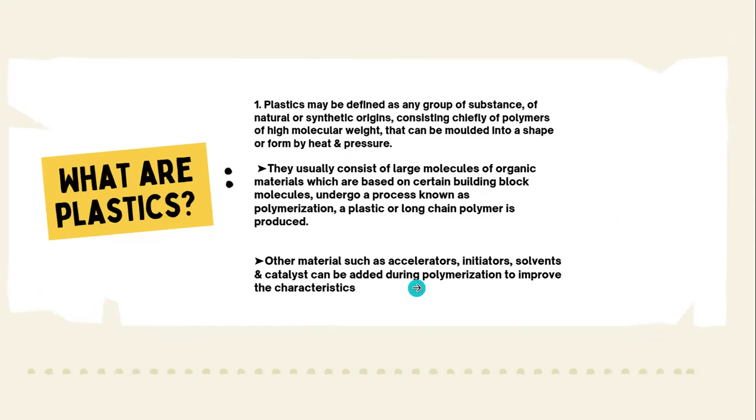Molecules undergo a process known as polymerization. A plastic or long chain polymer is produced. Other materials such as accelerators, initiators, solvents, and catalysts can be added during polymerization to improve the characteristics.

So, what are the advantages? The advantages are lightweight, reduced volume, no corrosion problems, and good resistance to mold and bacteria. Generally inert chemically, but be wary of solvents. Usually have good impact strength, difficult to break. If breakage occurs, fragments tend to be less hazardous than glass. Wide design and decorative possibilities.

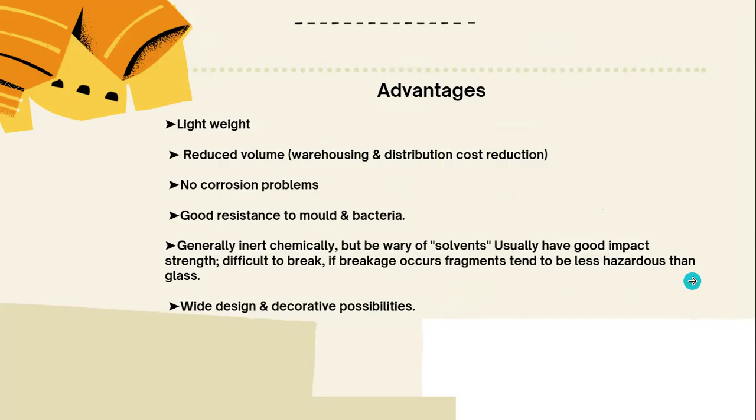Disadvantages: no plastic is totally impermeable to moisture and gases. Most plastics permit some passage of light; even highly pigmented plastics and those with UV absorbers are likely to let certain wavelengths through. Many are difficult to clean or are liable to attract dust and dirt under unfavorable conditions. May be permeable to or subject to attack by organic substances, particularly solvents.

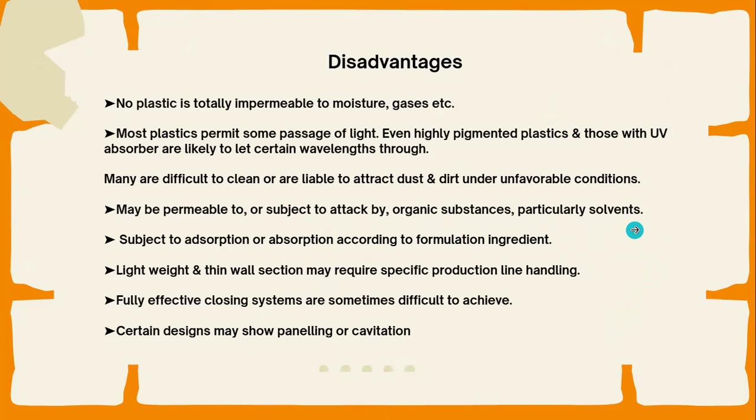Subject to absorption according to formulation ingredients. Lightweight and thin wall sections may require specific production line handling. Fully effective closing systems are sometimes difficult to achieve. Certain designs may show paneling or cavitation.

So, types of plastic. Thermoplastic polymers. These are heat softening materials which can be repeatedly made mobile and then reset to a solid state by cooling. Under conditions of fabrication, they can be molded by temperature and pressure. Examples are polyethylene, PVC, polystyrene, polypropylene, nylon, and polyester.

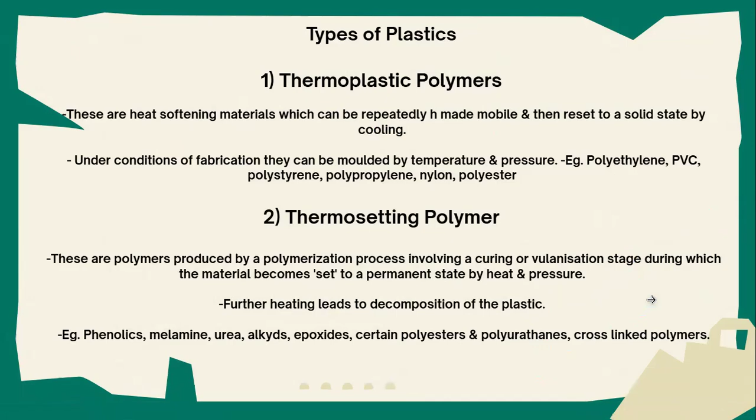Thermosetting polymers. These are polymers produced by a polymerization process involving a curing or vulcanization stage during which the material becomes set to a permanent state by heat and pressure. Further heating leads to decomposition of the plastic. Examples are phenolics, melamine, urea, alkyds, epoxides, certain polyesters, polyurethanes, and cross-linked polymers.

Plastics used for packaging. High density polyethylene characteristics: low cost, moderately flexible, stiffer, and has better barrier properties. Chemical resistant, poor clarity, translucent in natural state, can be tinted with any color, odorless and tasteless.

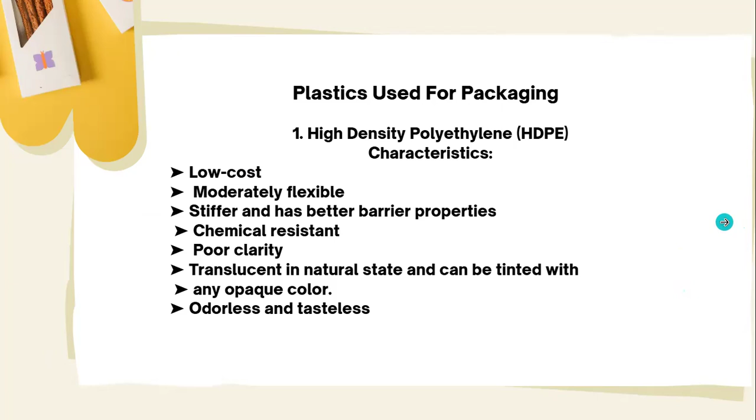Advantages: low cost, good moisture barrier, not attacked by most solvents. Disadvantages: poor barrier for oxygen and other gases. Odors and flavors are sometimes lost. Perfume or flavoring oils can transpire rapidly. Stress cracks in the presence of some products.

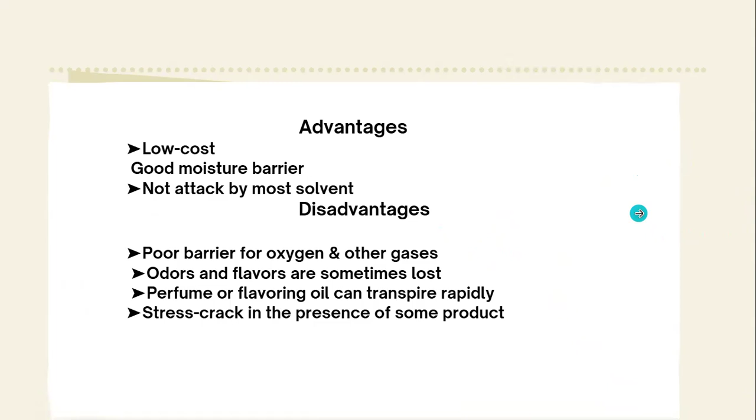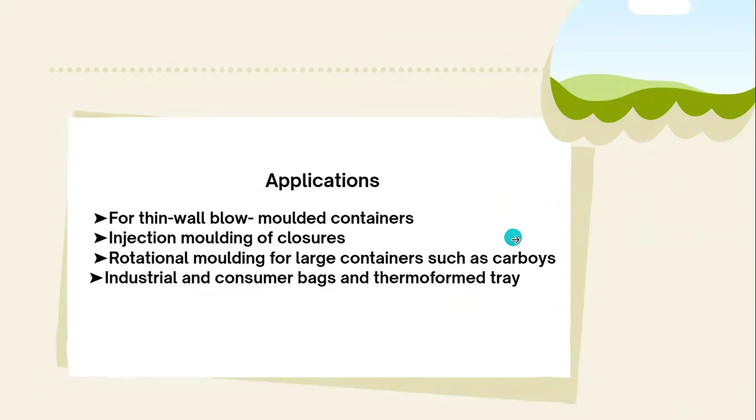Applications: thin wall blow molded containers, injection molding of closures, rotational molding for large containers such as carboys, industrial and consumer bags, and thermoformed trays.

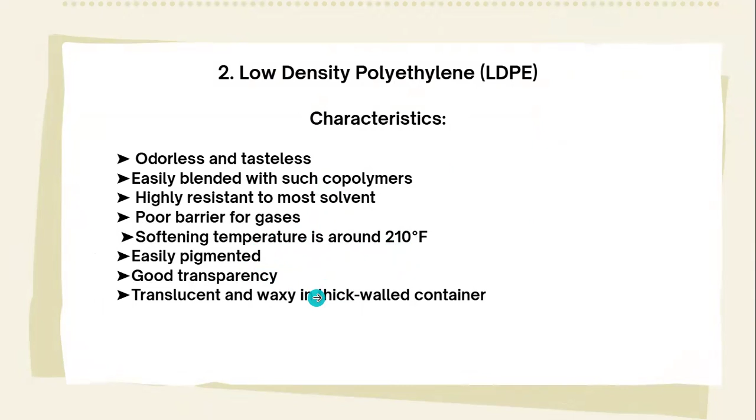Two, low density polyethylene. Odorless and tasteless, easily blended with copolymers. Highly resistant to most solvents, poor barrier for gases. Softening temperature is around 210 Fahrenheit. Easily pigmented, good transparency, translucent, and waxy in thick walled containers.

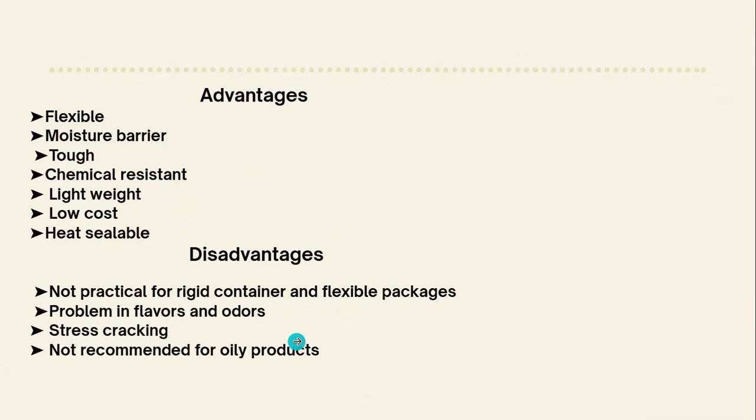So its advantages are flexible, moisture barrier, tough, chemical resistant, lightweight, low cost, heat sealable. The disadvantages are not practical for rigid containers and flexible packages, problems with flavors and odors, stress cracking, not recommended for oily products.

For applications, it is used for squeezable tubes and bottles, wraps and bags for different products. They're formed into trays for frozen food, and used as coating materials for bottle cartons, bacon wrap, and paperboard milk containers.

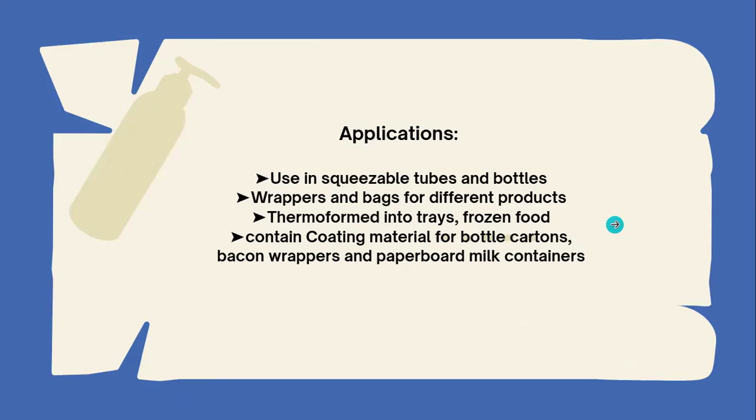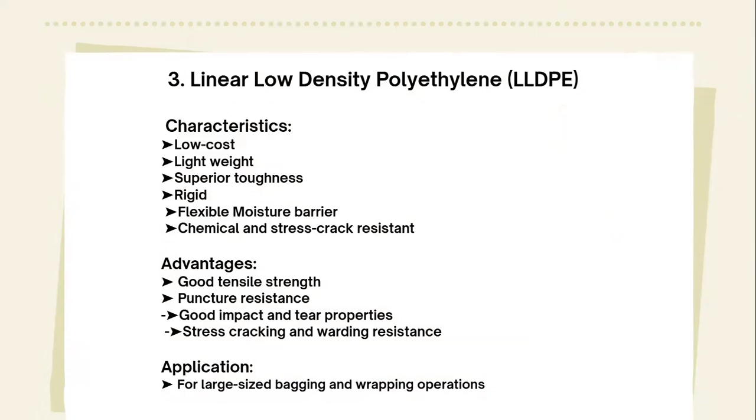So three is linear low density polyethylene. Its characteristics are low cost, lightweight, superior toughness, rigid, flexible, moisture barrier, chemical and stress crack resistant. The advantages are good tensile strength, puncture resistance, good impact and tear properties, stress cracking and warping resistant. For application, it is for large size bagging and wrapping operations.

So, polypropylene. Its characteristics are heat and chemical resistance, tough, rigid, resists oils and greases, stress crack resistance, fairly good barrier to moisture and gases, high melting point.

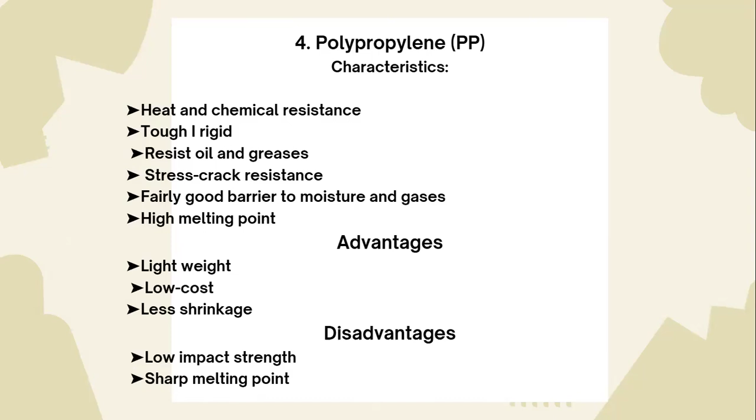The advantages are lightweight, low cost, less shrinkage. The disadvantages are low impact strength, sharp melting point. For application, it is widely used in closures of all kinds, suitable for some boil in bag packages and containers. Standard plastic in molded containers.

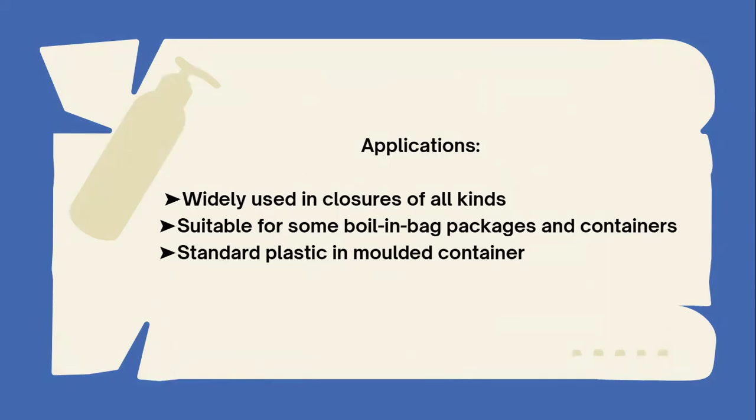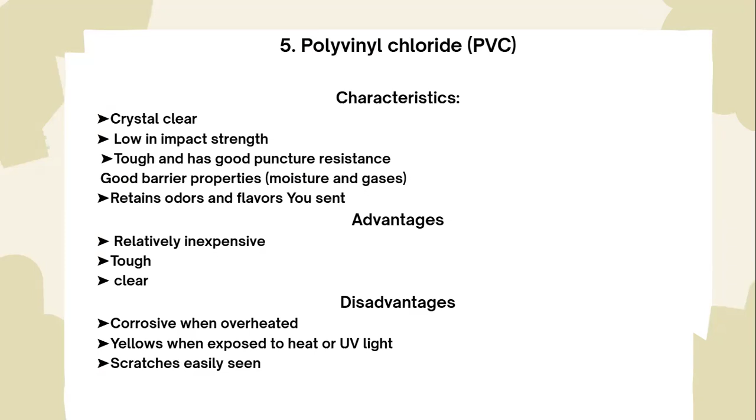Five is polyvinyl chloride. Its characteristics are crystal clear, low in impact strength, tough and good puncture resistance, good barrier properties, retains odors and flavors. Advantages: relatively inexpensive, tough, clear. Disadvantages: corrosive when overheated, yellows when exposed to heat or UV light, scratches easily seen.

Applications: packaging for pharmaceuticals and capsules, garment boxes, and pallet load wrapping applications.

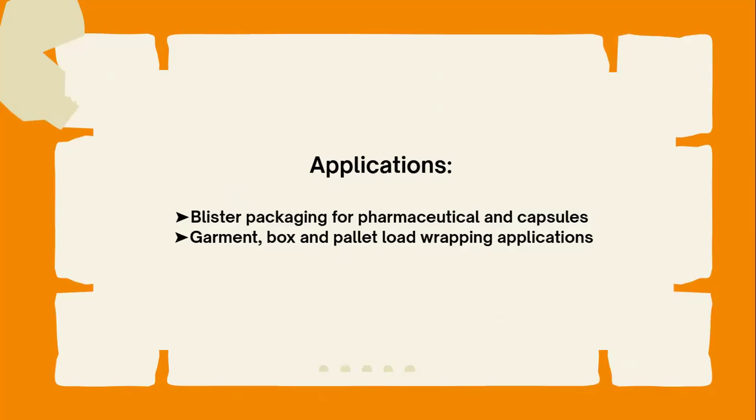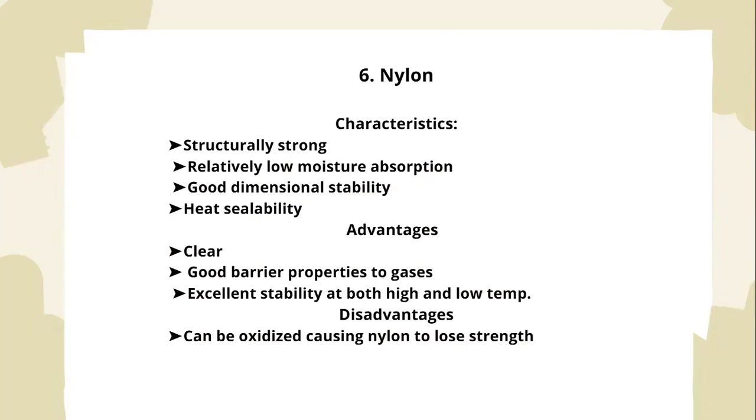Nylon. The characteristics of nylon are structurally strong, relatively low moisture absorption, good dimensional stability, heat sealability. The advantages are clear, good barrier properties to gases, excellent stability at both high and low temperature. The disadvantage is it can be oxidized, causing nylon to lose strength.

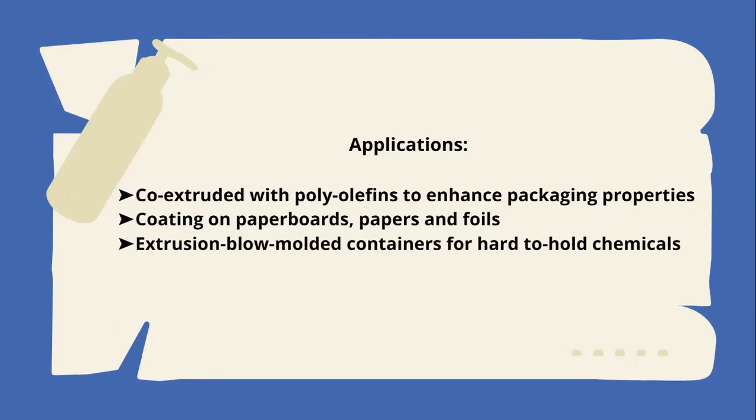For application, it is co-extruded with poly-olefins to enhance packaging properties, used as coating on paperboards, paper and foils, and extrusion blow molded containers for hard to hold chemicals.

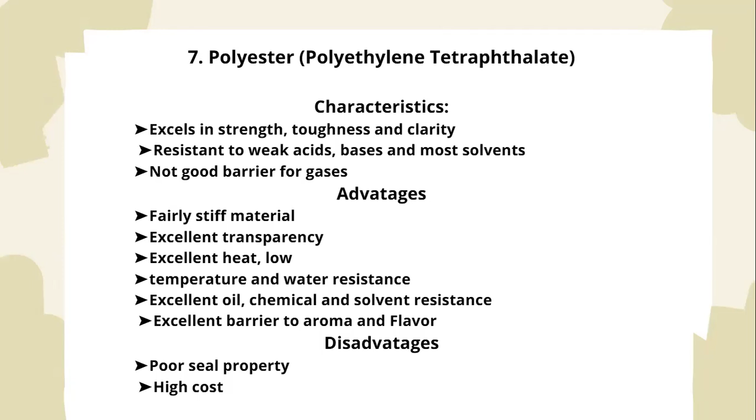Polyester. Its characteristics are excellent strength, toughness, and clarity, resistant to weak acids, bases and most solvents. Not a good barrier for gases. Its advantages are fairly stiff material, excellent transparency, excellent heat, low temperature and water resistance, excellent oil, chemical, and solvent resistance, excellent barrier to aroma and flavor. For disadvantages, poor seal properties and high cost.

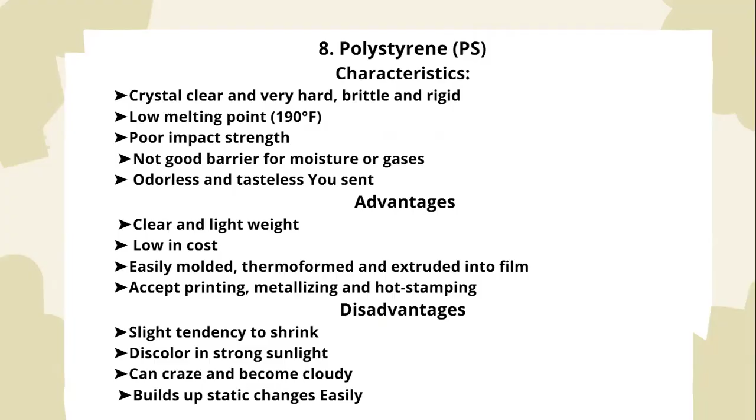Sa advantage naman, clear and lightweight, low in cost, easily molded, thermoformed, and extruded into film. Accepts printing, metallizing, and hot stamping. For disadvantage, slight tendency to shrink, discolors in strong sunlight, can craze and become cloudy, builds up static charge easily. Application is bottles for pharmaceutical tablets and capsules in molding.

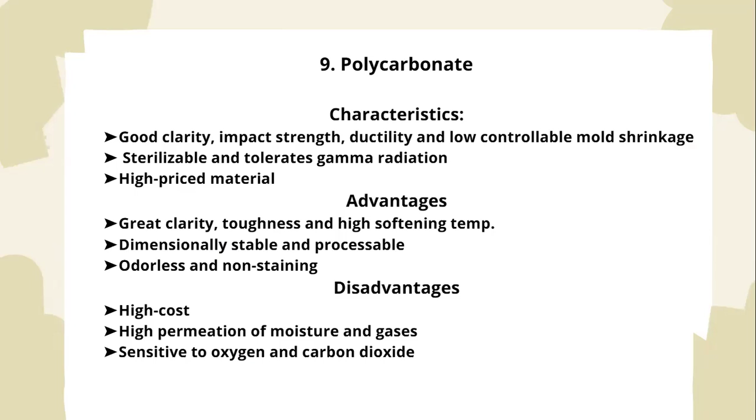Number nine is polycarbonate. So good clarity, impact, ductility and low, controllable mold shrinkage, sterilizable and tolerates gamma radiation. High-priced material. Ang advantage niya naman is clarity, toughness, and high softening temperature. Dimensionally stable and processable, odorless and non-staining. Disadvantage: high cost, high permeation of moisture and gases, sensitive to oxygen and carbon dioxide.

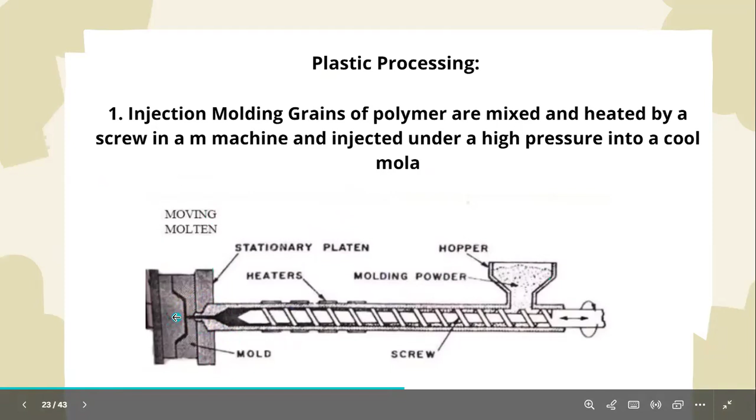Two, compression molding: powdered resin is put into a heated mold. Mold closes under high pressure. Plastic cures in a minute, then the mold opens.

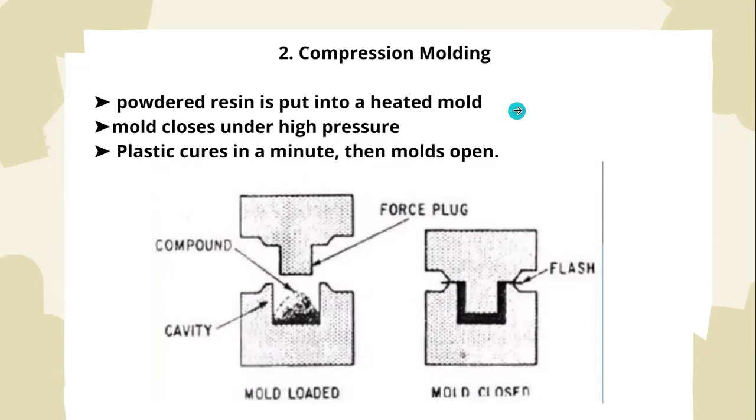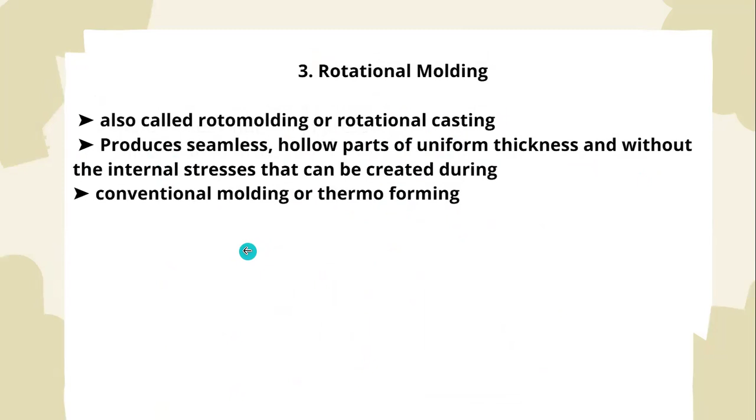Rotational molding, also called rotomolding or rotational casting, produces seamless, hollow parts of uniform thickness and without the internal stresses that can be created during conventional molding or thermoforming.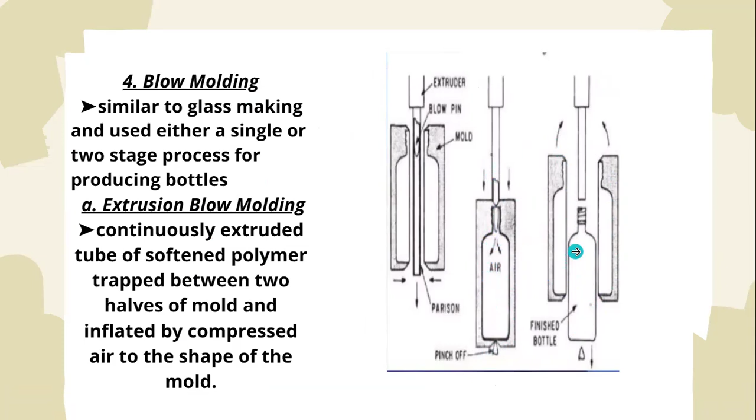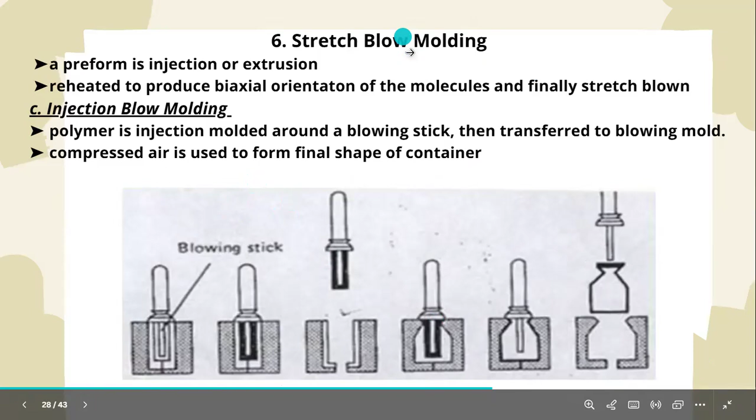Then, stretch blow molding. Stretch blow molding: the preform, made by injection or extrusion, is reheated to produce biaxial orientation of the molecules, and finally stretch blown. Injection blow molding: polymer is injection molded around a blowing stick, then transferred to a blowing mold. Compressed air is used to form the final shape of the container.

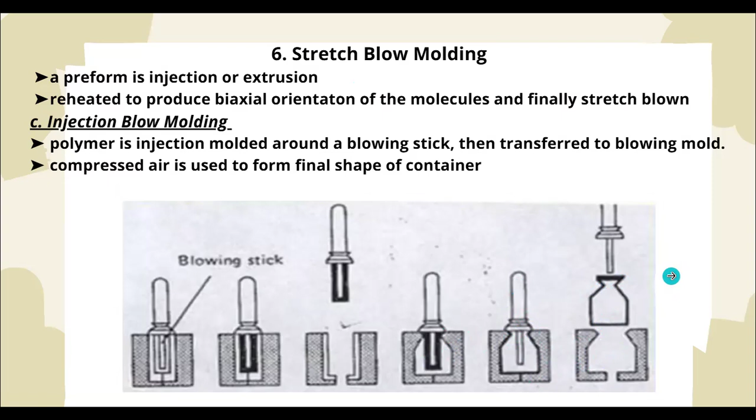Thermoforming. Film is softened over a mold and vacuum or pressure is applied.

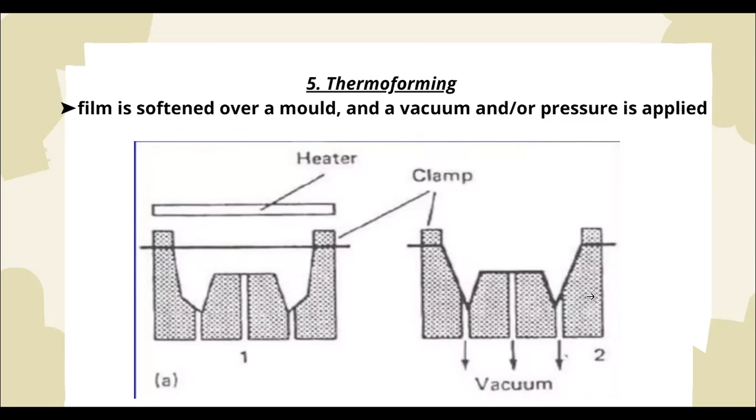Typical technologies of converting give new processing to yield new value on rolls, applied to substrates which are plastics, film sheet, paper, and cloth.

Coating is a membrane that is coated liquid on film sheet, a process of applying one or more layers of polymer, latices, or polymer melt to the surface of a substrate.

Laminating is made of multiple layers by adhesive and extrusion molten resin. Printing is used to express conveyance of information and ornament.

For metallizing, metals are vaporized and adhere to the substrate.

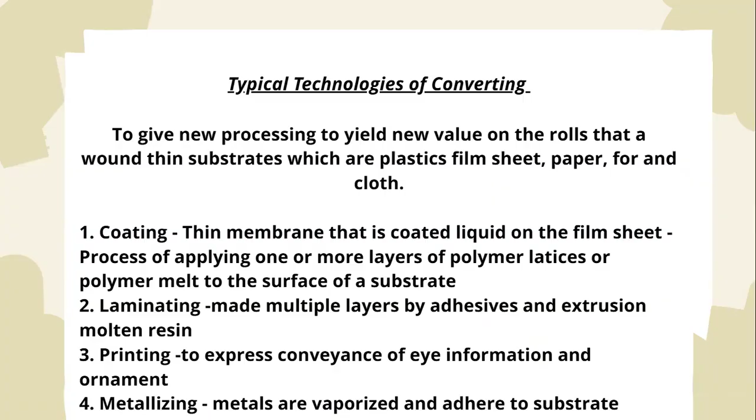Number five, embossing: offset of concave convex design to substrate by embossing to make soft feeling and matte surface.

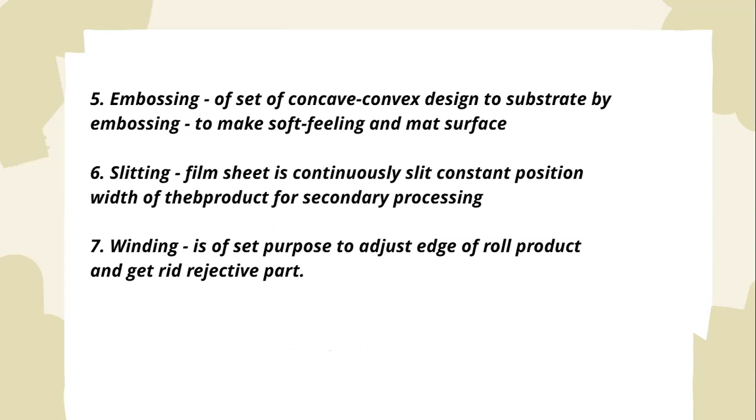Slitting: film sheet is continuously slit at constant position width of the product for secondary processing. Seven, winding is set to adjust the edge of roll product and get rid of rejected parts.

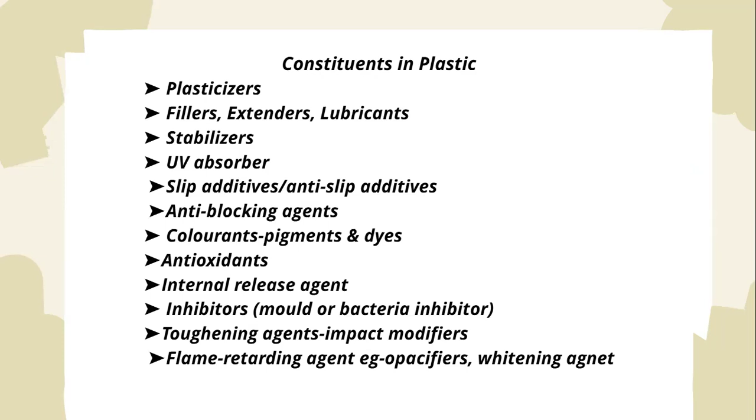Constituents in plastic additives: plasticizers, fillers, extenders, lubricants, stabilizers, UV absorbers, slip additives, anti-slip additives, anti-blocking agents, colorants, pigments, antioxidants, internal release agents, inhibitors, toughening agents or impact modifiers, flame retarding agents, and opacifiers or whitening agents.

Plasticizers improve the flow properties of material, increasing softness and flexibility. They are found mainly in polyvinyl chloride and celluloses. The most common PVC plasticizers are phthalate esters, sebacates, adipic esters, and polymeric plasticizers.

Fillers are inert solid substances such as carbon black, chalk or calcium carbonate, China clay, silica, and magnesium carbonate. The maximum limit of filler is up to a 1:1 ratio with the binding resin.

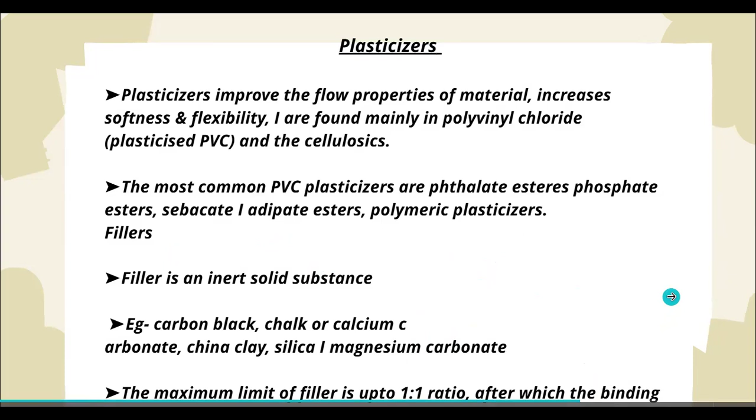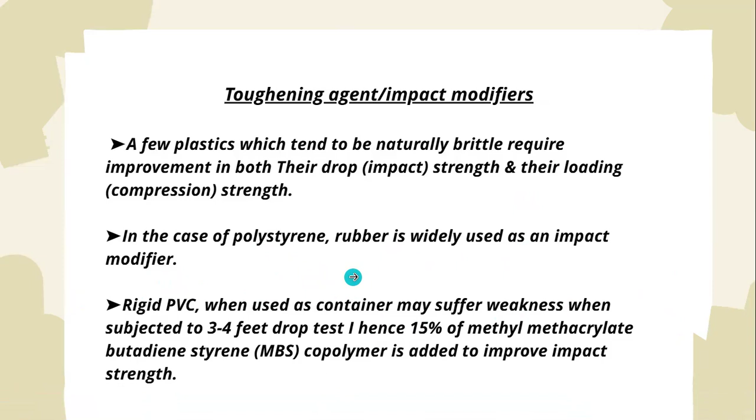Toughening agents or impact modifiers: a few plastics which tend to be naturally brittle require improvement in both their drop impact strength and loading strength. In the case of polystyrene, rubber is widely used as an impact modifier. Rigid PVC used in containers may suffer weakness when subjected to a 3 to 4 foot drop test, hence 15% of methyl methacrylate-butadiene-styrene copolymer is added to improve impact strength.

Lubricants may be added either as an additive or at the fabrication stage as a processing aid. In general, lubricants prevent adhesion with metal parts, and may also improve the flow, thereby lowering the temperature of the molding operation. Silicone polydimethyl siloxane may be used in LDPE, HDPE film to improve flow. Lubricants may be solid, such as waxes or stearates, or liquid, such as liquid paraffin.

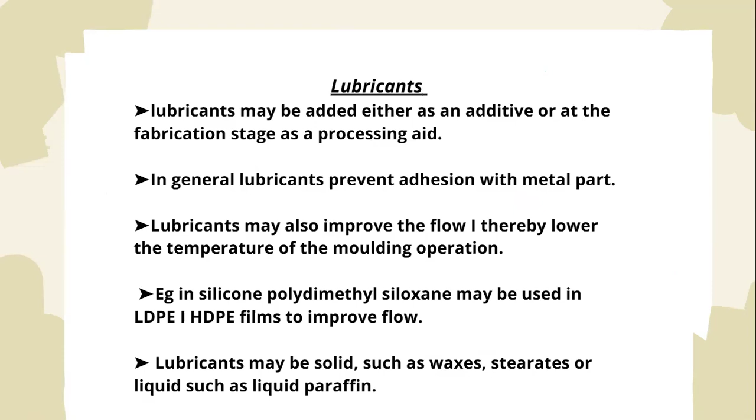Stabilizers increase the stability of plastic either during processing or during the molded life of the material. Stabilizers are frequently used to combat degradation caused by heat and light.

UV absorbers may be used for two reasons: one, to protect the plastic from UV degradation; two, to prevent product degradation due to UV rays passing through the plastic. Chemical UV absorbers may be based on substituted phenols or benzophenones. Iron oxide and carbon are also used.

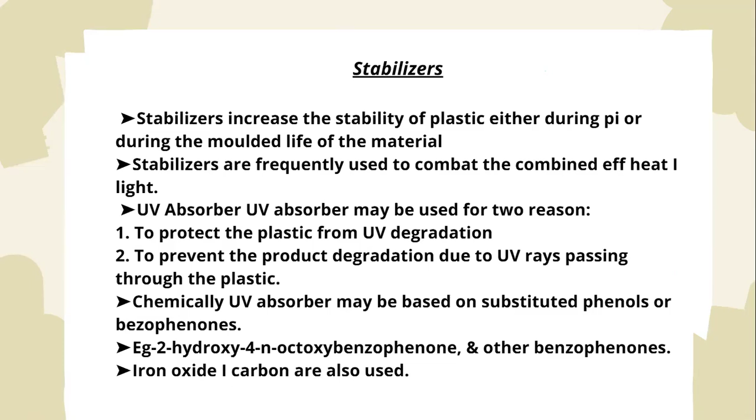Slip additives are widely used for films, either made or used on relatively high-speed equipment, where non-slip properties might be detrimental to output. The most used slip additives are oleamide and stearamide; since they operate at the film surface, they can be physically removed by abrasion.

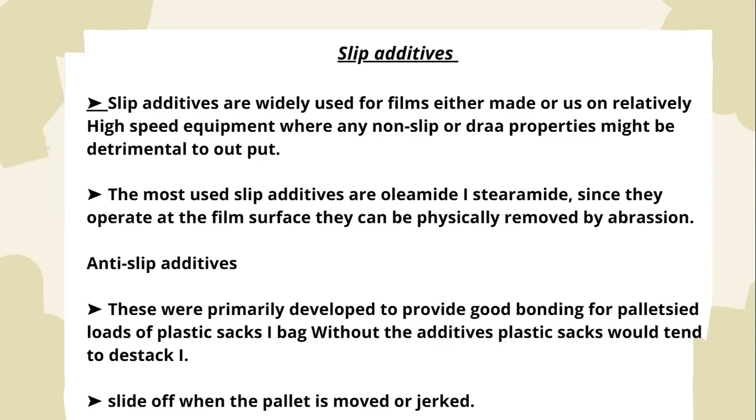Anti-slip additives were primarily developed to provide good bonding for palletised loads of plastic sacks and bags. Without the additive, plastic sacks would tend to slide off when the pallet is moved or jerked.

Anti-blocking agents: blocking is when reel wound or sheet stacked materials may be difficult to separate due to blocking, which may be caused by smoothness of the surface. It can be prevented by incorporation of finely divided silica or diatomaceous earth.

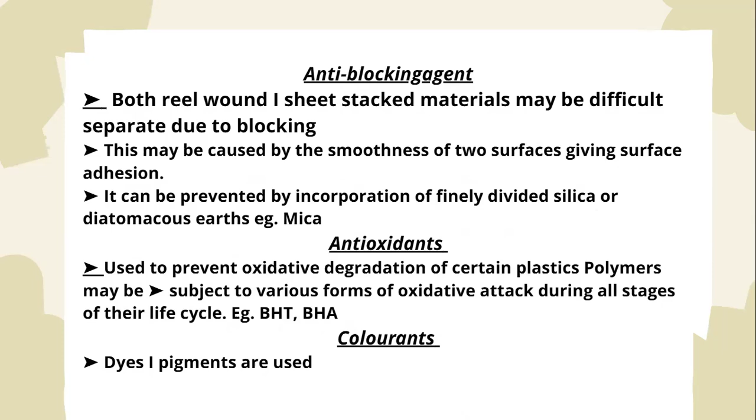Antioxidants are used to prevent oxidative degradation; certain plastic polymers may be subject to various forms of oxidative attack during all stages of their life cycle. Colorants and pigments are also used.

Extenders are somewhat similar to fillers; they are used to lower cost as a substitute for plastic.

Internal release agents are similar to lubricants in that they provide release from the metal mold—zinc, calcium, or magnesium stearate. Inhibitors are used to prevent microbial growth.

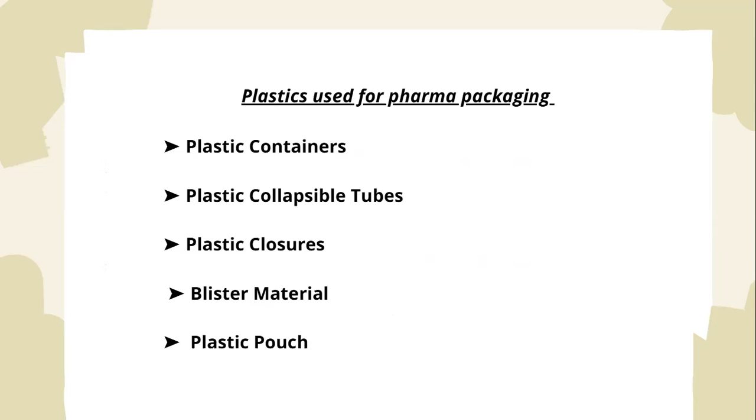Plastic container advantages: easily formed, freedom of design, extremely resistant to breakage, and lightweight.